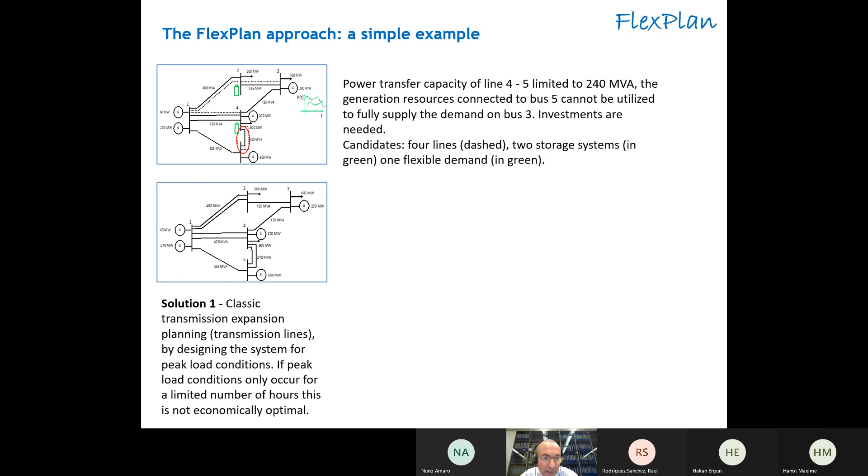The traditional solution of the problem is an expansion based only on new lines, that is based on peak load conditions. But if peak load conditions occur only for a limited number of hours, that is not economically optimal. Another solution is, for instance, not to expand the corridor 4-5, but to flexibilize the load located at bus 3.

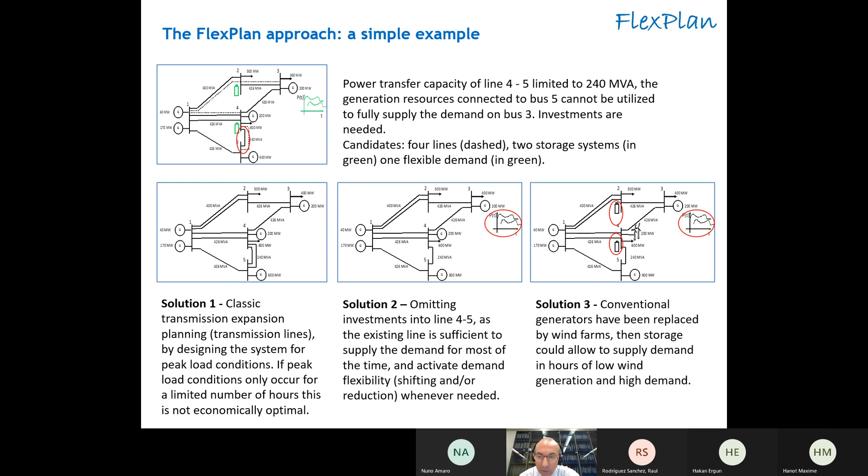That means, of course, to reduce and to adapt load to the possible provision of generation from RES, which of course has peak generation in some moments and low points at other times. Then another possibility is, should we have some wind parks at bus 3, to activate storage in buses 2 and 5, and that could be very useful in order to cope with the variability at bus 3. So as you can see, there are many possibilities.

We want to analyze all those candidates all together. In order to do so, we are creating a new optimization model that optimizes as a whole the social welfare, and it takes as an input a lot of candidates of grid investments and flexibility options that are provided by a preprocessor. The preprocessor is also part of our package, and it will be illustrated by Raul in one of the next speeches.

What are the most important characteristics of the new planning tool? It implements a best planning strategy with a limited number of expansion options. We implement a mixed integer sequential OPF. We have T&D, so transmission and distribution integrated planning. We embed environmental analysis so that air quality, carbon footprint, and landscape constraints are inside the CBAs, inside the optimization model itself. We have simultaneous long-term planning, including years 2030, 2040, and 2050, considered all together and not in sequence.

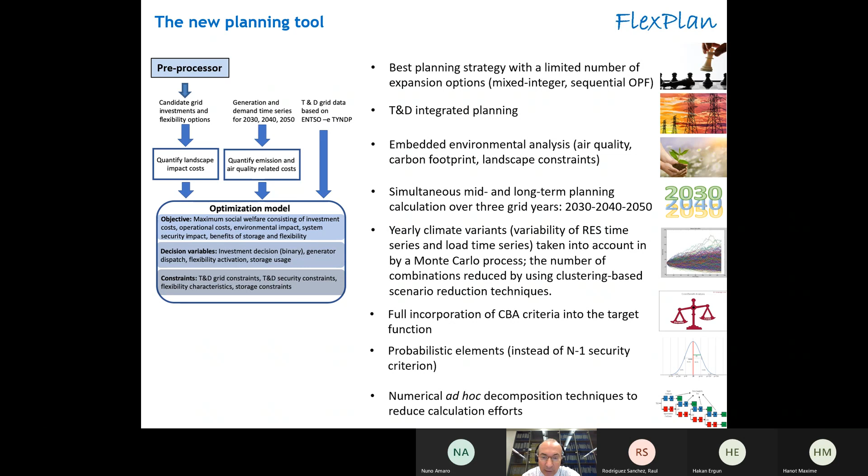We consider climate variants by means of a Monte Carlo process. We reduce the number of combinations by using clustering-based scenario reduction techniques. We incorporate all criteria into the CBA that is inside the optimization model, so inside the target function of the optimization. We implement probabilistic elements to replace the n-1 security criterion, and we adopt ad hoc decomposition techniques to reduce calculation efforts.

Regarding the Monte Carlo approach, we are implementing yearly climate variants that take into account different load and RES time series for different climate years, so wet instead of dry years, windy or not windy years. Of course the number of combinations is very high, and we reduce them by using clustering-based scenario techniques. But if we adopted the Monte Carlo approach to solve the problem, each Monte Carlo run is separate, so investment decisions would be taken separately, and we would not know how to put them together.

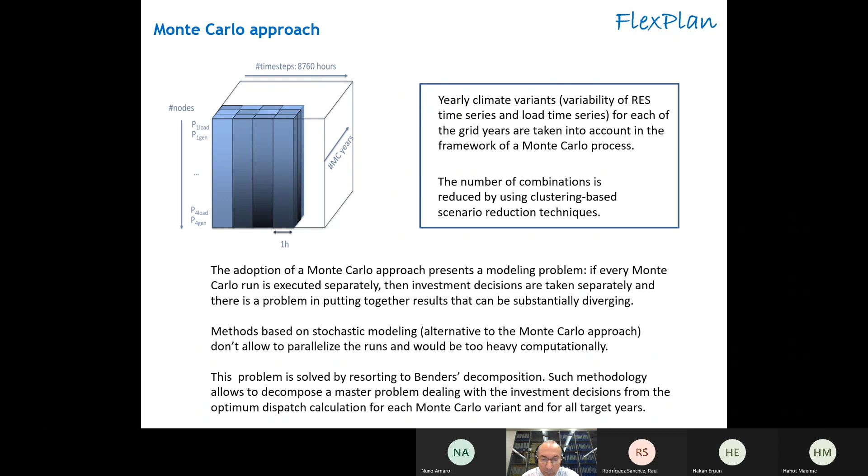By contrast, we have to adopt a stochastic model that takes into account all the different variables weighed with their probability. But in order to do so, we have a very heavy computational model. So we resort to Benders decomposition, which is able to separate the run of the master problem with investment decisions from separate dispatching models that implement different calculations for every Monte Carlo variant and for the different target years.

For the definition of the candidates, as I said, we use a preprocessor. That preprocessor uses a non-expanded OPF for the different grid years in order to understand the needs for expansion of the network, and in order to calculate those candidates and see what expansion possibilities are there, it uses the Lagrange multipliers of the transit constraints in the optimization model, which provide information on the improvement of the target function in consequence of a unit relaxation of that constraint. Depending on that, the preprocessor elaborates the planning candidates.

As far as the regional scenario generation is concerned, we use the three scenarios put forward by the TYNDP 2020 document by ENTSO-E. There are three storylines: national trends, distributed energy, and global ambition. These were used as such to set the scenarios for 2030 and 2040. Then for 2050, a smart extrapolation of those scenarios was carried out, also taking into account the document A Clean Planet for All by the European Commission. As a whole, we have 9 scenarios: 3 storylines multiplied by 3 grid years, 2030, 2040, and 2050.

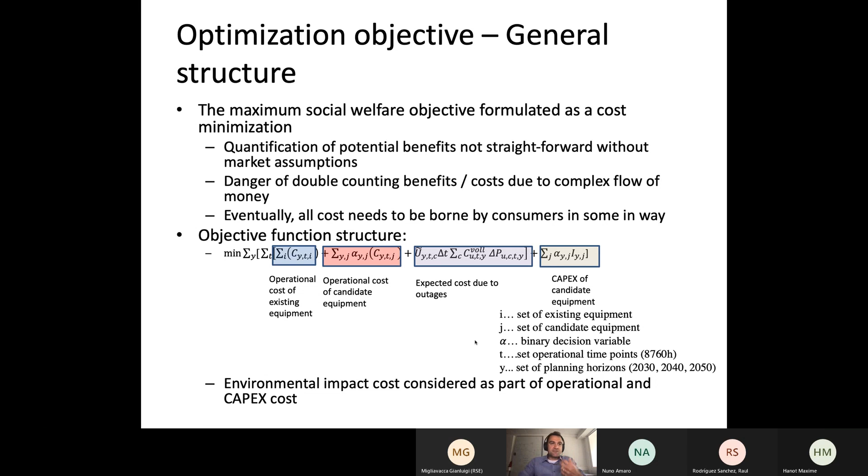And as mentioned, for each planning year and for each hour that we are considering, we are accounting for the operational cost of existing equipment, of candidate equipment. We are also accounting for the expected cost due to the outages that might be caused, and then, of course, also the capital investment costs for the candidate equipment. And we try to internalize the environmental impact cost as part of the objective function, which I'm going to talk about in a bit.

How did we model the network? For the transmission system, we used the linearized DC power flow equations to represent both the AC and the DC network in order to keep the problem tractable. For the radial medium voltage distribution networks, we have chosen the linearized DistFlow model, which allows us to also account for the voltage magnitudes and reactive power, which is very important because of the R/X ratio of the medium voltage network. Of course, also modeling all the low voltage networks would be out of scope of such a planning exercise.

We have also used separate investment decisions for AC lines, DC lines, converters, and PSTs. This way, actually, we can choose to invest into point-to-point or meshed DC networks, for instance. And last but not least, the network model allows the possibility of accounting for line replacements as well, meaning that a new line at a particular corridor might only be built if the old one is decommissioned. And for the details of the network modeling, I will refer to the project deliverable that we have available on the website.

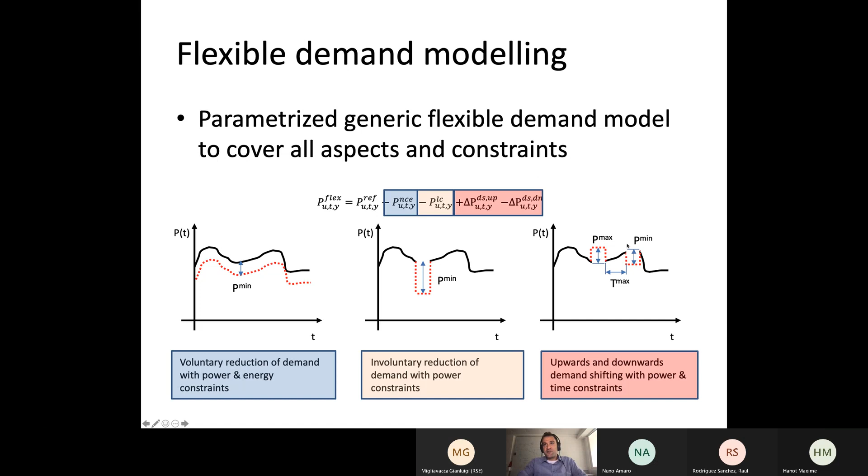Of course, in hours where there might be adequacy issues, some involuntary demand reduction might occur. But then this involuntary demand reduction will be penalized with a very large cost, usually 2 orders of magnitude higher than generation costs, so to be used just as a last resort. And then last but not least, we can do demand shifting, where at the end of the day, the energy consumed will remain the same. But we need to account for intertemporal constraints for this because we cannot shift demand infinitely in time.

How did we model the environmental impact? We have there three main components. The first model is the air quality impact model. And there we developed a linearized model using reference historical data about the emissions of power plants and then the concentration of these emissions in the air.

And starting from there, we can then also look at the health impact of these emissions and try to monetize this. And this gives us the possibility to represent the air quality impact cost of a conventional generator with respect to the megawatt hours produced. And this we can then just internalize in our objective function.

Secondly, we have modeled the carbon footprint of the new assets that we are investing in by means of a life cycle analysis, which then takes into account how much CO2 has been emitted in the production of this equipment, but also, of course, during the installation.

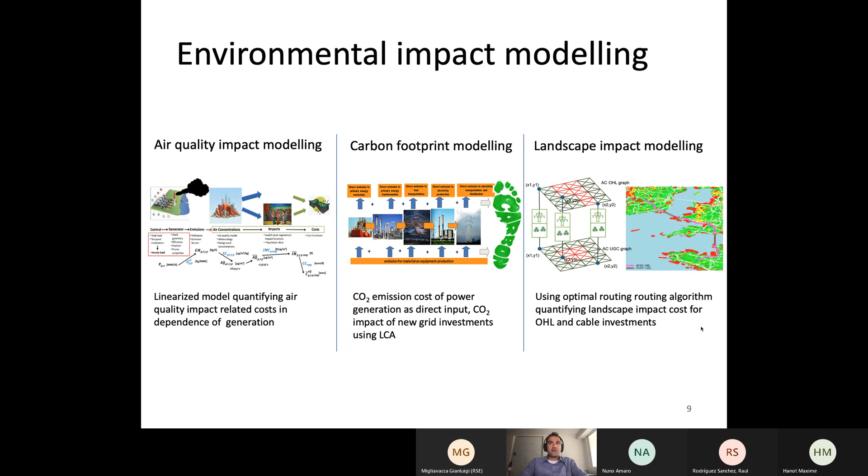As I was mentioning before, we try to have a holistic system view and really to look at the system design, both of the transmission and the distribution system. So the model that we came up with is very generic and supports the modeling of transmission systems only, the modeling of distribution systems only, but also the combined model of both.

But of course, in the realistic test cases, as we are envisioning to apply it, where we have potentially hundreds and thousands of buses of transmission, and if you imagine that you also have several distribution feeders connected to all these transmission nodes, then the system is going to be huge. So we had to come up with a model decomposition in order to have a tractable optimization model.

And therefore, actually, we are first solving the distribution system planning problem for a number of flexibility objectives, which means in the very first case, for instance, we can say that the distribution system becomes inflexible with respect to the transmission system and only tries to minimize the investments in the distribution system to solve local congestion.

But then increasingly, we can solve the same problem with the objective of providing more and more flexibility towards the transmission system. And this allows us to make a decoupling for the transmission problem, where we can then just plug the flexibility levels of the distribution system as a planning candidate into our model with associated investment costs.

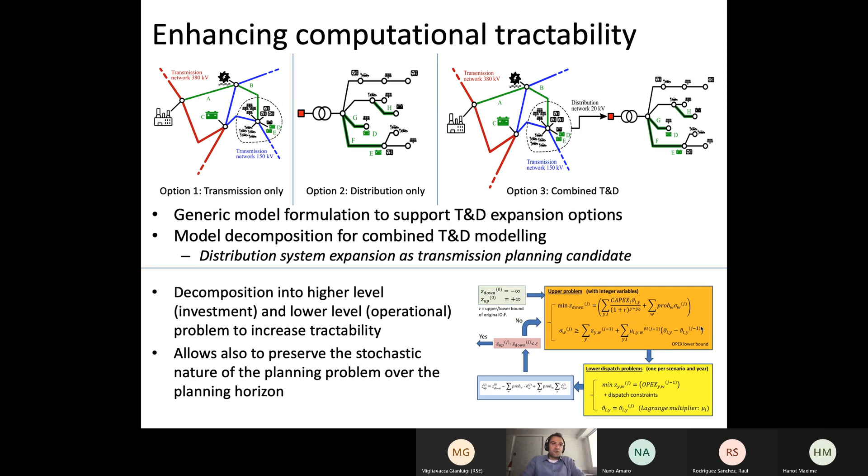We have also implemented this model for validating and testing, which then serves also as a test bed for the actual planning tool which is being developed, which Maxime is going to talk about later. I refer to the two publications here for the details of the implementation as well.

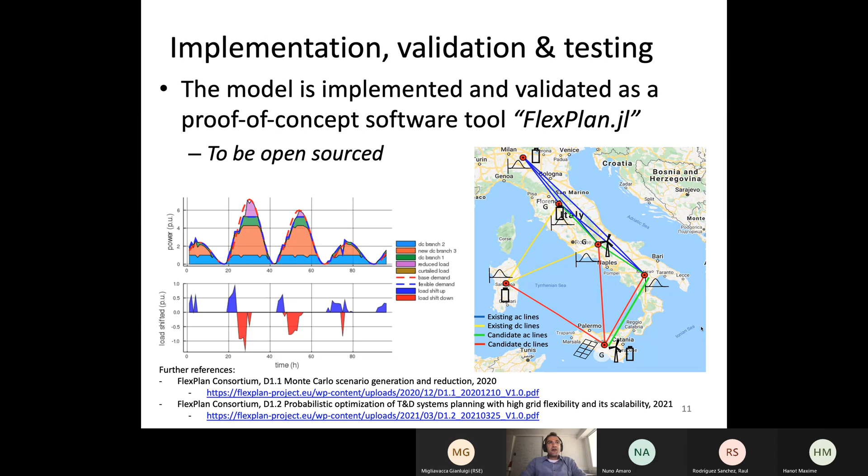What can we do with this proof of concept implementation? First of all, we can look in a detailed way at the sensitivities of the model. Here I just picked a very simple test case that we are using on the basis of Italy, a 6-bus network, where we have looked at what the optimal system expansion would be if we didn't have any demand flexibility versus the case where we have demand flexibility. And this we have done for a number of climatic variations, which is here indicated by the cluster number.

And of course, not surprisingly, we see that the total system cost, consisting of investment and operational costs, becomes much higher in the case where we don't have demand flexibility, because we end up installing storage facilities which are only utilized for a small number of hours in a particular year.

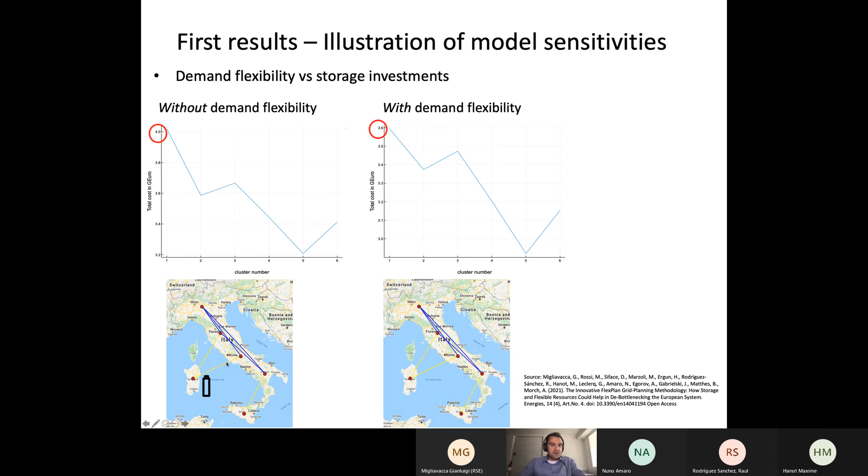The implementation that we have also allows us to test actually the sensitivities with respect to the probability of certain scenarios occurring. So here on the left-hand side, we have done an analysis where we have analyzed the probability of a high renewable energy scenario occurring, and then we can see how the total system costs are changing with respect to the likeliness of higher renewable generation being existent in the system.

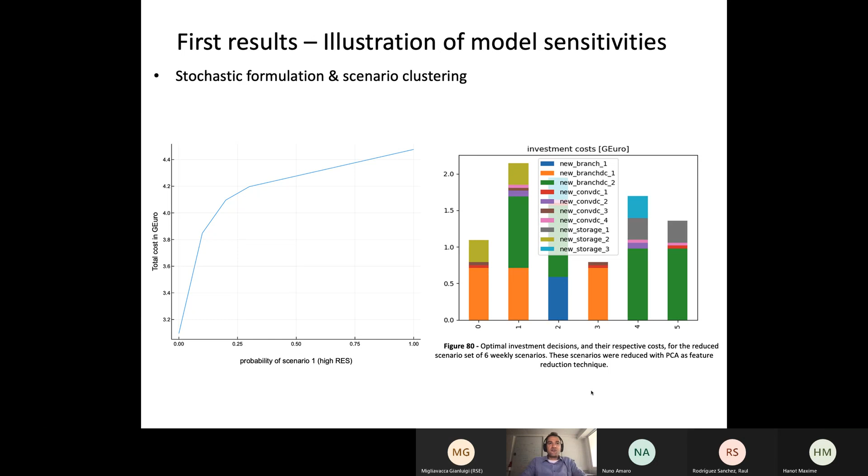And as our optimization problem has many dimensions and it's a very complex problem to solve, we have also been looking into different scenario clustering methods and time series clustering methods. So also this proof of concept implementation helps you to analyze what the quality of your clustering methods is. But I'm not going to go into further detail there. More details you can find in the respective deliverables.

And this brings me to my conclusions. So within FlexPlan, we have developed a comprehensive planning model to really find the trade-offs between flexibility and classic grid investments. And we can apply this methodology to both transmission systems or distribution systems or both combined. To keep the problem tractable, we have come up with a number of decomposition techniques, and we have also implemented this in a proof of concept software library, which we will open source in the course of the project.

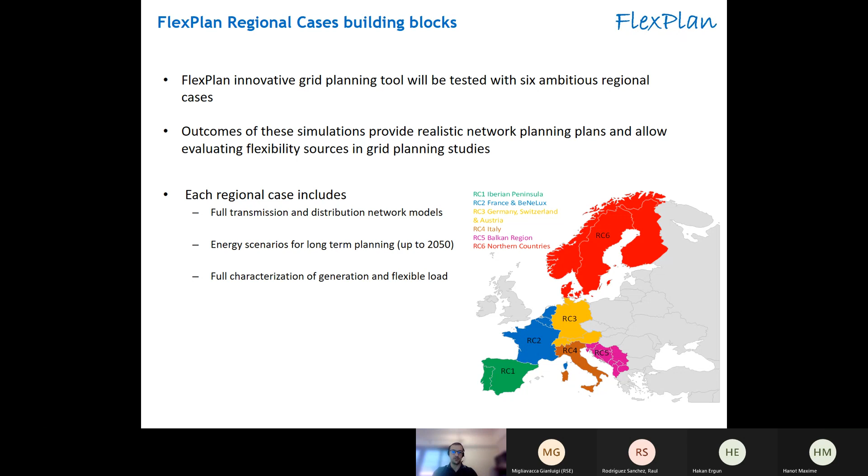As we saw in the previous presentations, the main goal of FlexPlan is to develop an innovative grid planning tool, and we are validating this tool within the project scope by using 6 ambitious regional cases that cover almost all Europe, as you can see in the map. The main goal is that the outcomes of these simulations provide realistic network planning plans, and also allow to evaluate flexibility sources in these grid planning studies. Each regional case is composed of 3 main blocks: the network models, which include full transmission and distribution systems, the energy scenarios to be simulated for long-term plan analysis, up to 2050, and the full characterization of generation and flexible load elements.

For the grid models, we all know that accurate grid models are core for the soundness of solutions in simulation projects and other works. So for this purpose, in FlexPlan, we set up a complex activity to develop realistic grid models, which cover almost all Europe, and include both transmission and distribution systems. For the transmission systems, we are using a pan-European real transmission network model, provided by the TSOs. And for the distribution networks, we are using synthetic network models, which are also based on statistics from real networks. It is important to highlight that these models are large scale and realistic. We have a one-to-one representation of grid nodes when we compare our models to the models that the TSOs use in their own expansion plans.

So for the transmission system, our main data source is a real model of the pan-European transmission system from ENTSO-E, which uses real transmission models provided by the TSOs. There are, however, some details.

So in some countries, what can be named the sub-transmission network is missing. So in these cases, we had to complement this data received from ENTSO-E with either TSO level data or recurring to other open sources. And the models were fully validated by us and complemented. So as one example, we included the full description of the geographic location of all substations in these models.

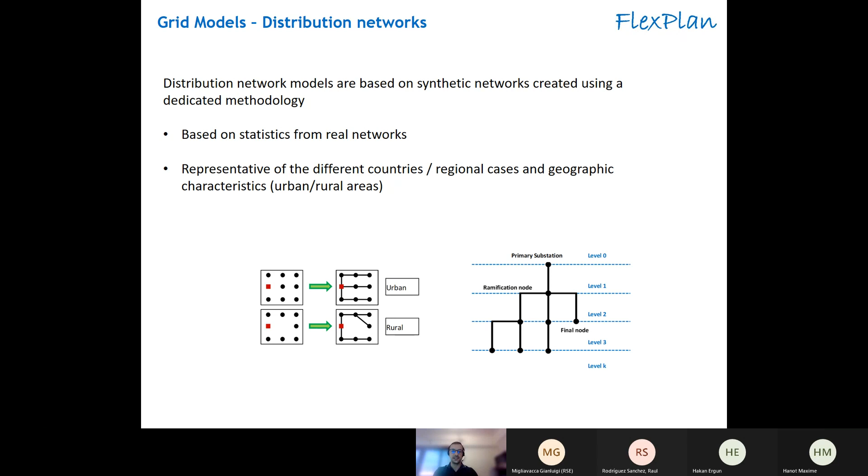Then for the distribution systems, these are based on synthetic networks, as it is very hard or almost impossible to obtain realistic models for all Europe. And these were created using a dedicated methodology, which is based on statistics from real networks. Not only are they realistic, they are also representative of the different countries or the regional cases. And inside each country, they are also representative of the different geographical conditions. So, as one example, we consider different networks for urban or rural areas, which allow us to have a realistic approach also on the simulation of the distribution systems.

In terms of the second building block, the scenarios that we want to simulate, in the scope of FlexPlan, we create 3 different scenarios to be simulated for the 3 target years, 2030, 2040, and 2050. Each scenario considers 5 variants, which result from a clustering algorithm of 40 different variants, each one corresponding to a different climate year. The 3 macro scenarios are based on the TYNDP 2020 storylines from ENTSO-E. We kept the same names on purpose, for simplification. So we have the national trend scenario, the global ambition one, and the distributed energy scenario. And of course, the 3 of them present different forecasts for the pan-European system in the next 3 decades.

And these 3 scenarios were further adapted by us in the FlexPlan scope to include 2050 data, because in TYNDP there was no data for 2050 at country level. So we made an extrapolation of data from TYNDP 2020, from the 2030 and 2040 data already existing in this data set, and we validated our own extrapolation using the A Clean Planet for All energy package from the European Commission.

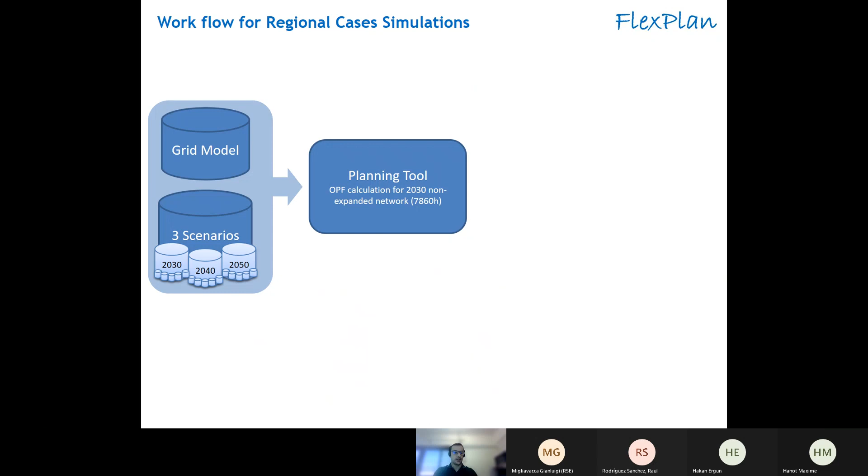Then the next step, which is now starting, is actually to run the OPF calculations on the planning tool. So we will start with an OPF calculation for the first 2030 non-expanded network scenarios. It's important to highlight that we are talking about a full year, so 8,760 hours OPF for 5 variants. And then we enter a loop between the planning tool and the preprocessor that we saw before in Raul's presentation for the selection of the different expansion candidates for the different scenarios and the different target years we have.

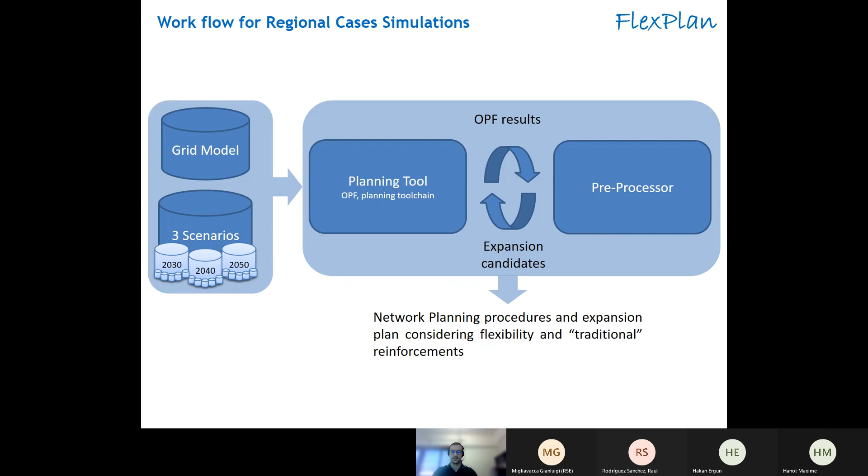And then, of course, the main outcomes will be the different network planning procedures, the expansion candidates, let's say the expansion plan, which considers both flexibility solutions and also the traditional grid reinforcement, so the creation of possible new lines and installation of new transformers as one example. And this is it from my side, with a quick explanation on what our regional cases are and what we will do on this simulation. So thank you very much for your attention.

Thank you very much, Nuno. I think that this presentation gave you the impression of the complexity of this generation of 6 regional cases. And so that gives also the measurement of how big and how robust the planning tool should be in order to be able to withstand such a big and harsh proof. And so Maxime will be the last speaker to tell you about the realization, as a big and challenging software engineering task, of such a big grid planning tool. Please, Maxime. Thank you, Gianluigi.

So indeed, my presentation, which will be the last for today, is going to be about the implementation of the planning tool itself, which is indeed a challenging software engineering task. So my presentation will be in 3 parts. First, I will describe the architecture of the planning tool, the design, the interactions with the different parts. Then we will speak about the implementation itself and in particular the challenges that we are facing. And finally, I will showcase the mock-up of the graphical user interface because it is still under implementation. So let's start with the architecture and the design.

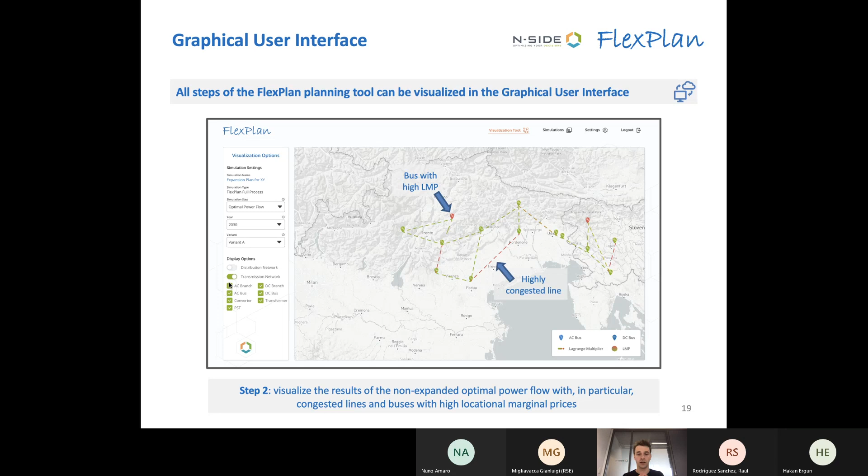Then you can visualize the results of the OPF, whose goal is to identify the congestions in the grid, the bottlenecks, with the congested lines, and buses with high locational marginal prices. And then afterwards, you can see the candidates which are provided by the preprocessor. So the candidate lines, but also the buses with storage candidates or flexible load candidates.

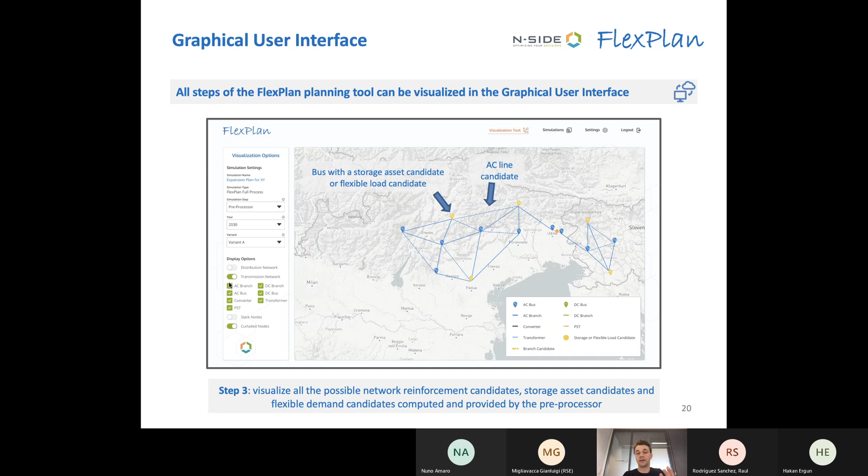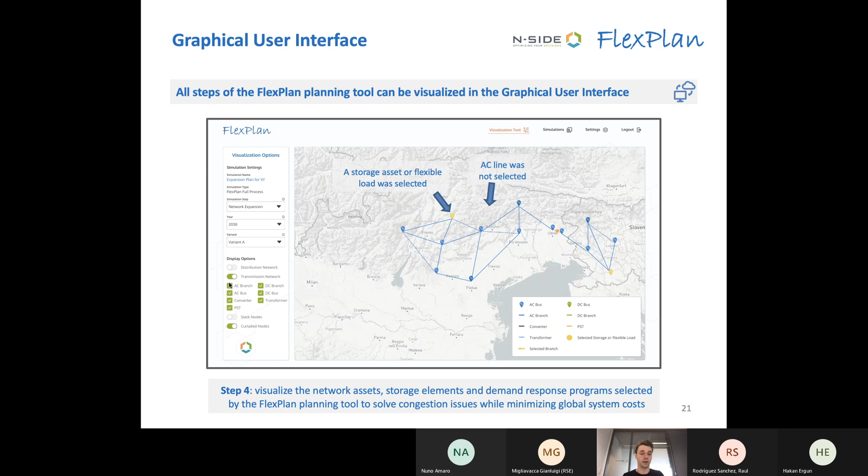And the last step, when the planning tool is performing the optimization, is to see, from all these candidates, the remaining ones which were selected. The ones which are no longer there are the ones which were not selected, and the ones which still appear are the ones which were selected. So that's it for my presentation.